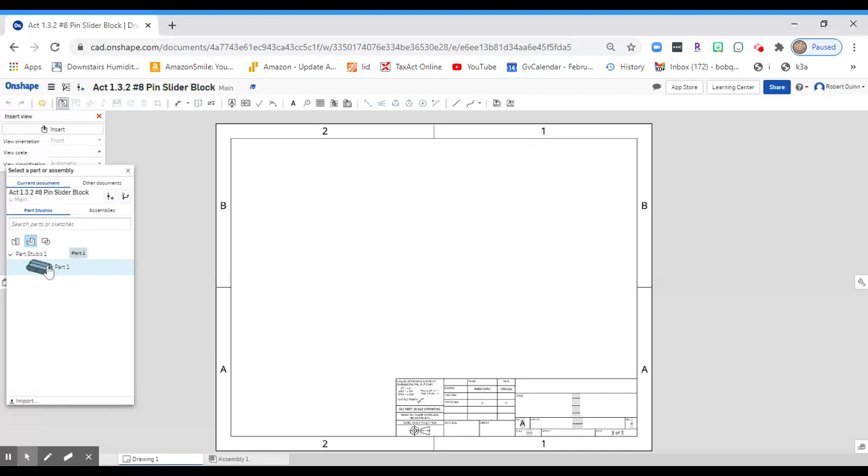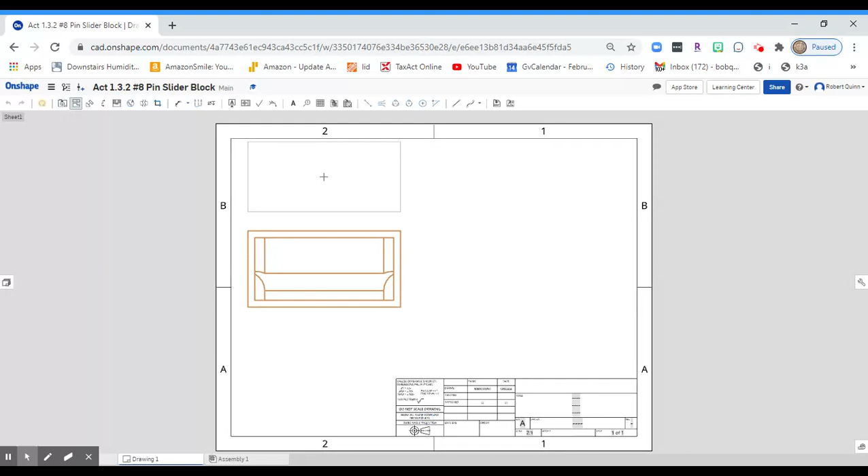Now the view it's going to give me, that's a better top view than a front view, so I'm going to click where it says front and change that to bottom. That's the way it's going to give me a better front view, so I'll click that as a front view. Now, there we go, that's a better top view. Notice I'm on the projected view by default, so if I click on the front view and go to the bottom, it's going to give me a bottom view.

Okay, I want to add a right view as well, so I'm going to click on the front view and then click on the right. Here it's going to give me a right view. And now I'm going to click on the front view, and I'm going to go up at the top, and it's going to give me an isometric view.

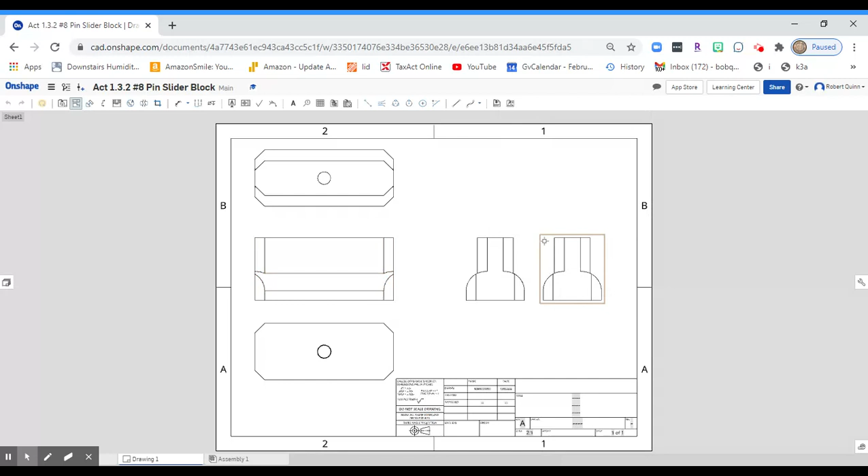Oops, I'm going to do Control-Z to delete that one. I'll just click on it and hit the delete key. There we go, that's better. Hit escape. Okay, I'm going to click back on my projected view, click on projected view, and I'll make an isometric one. That's good for an isometric view.

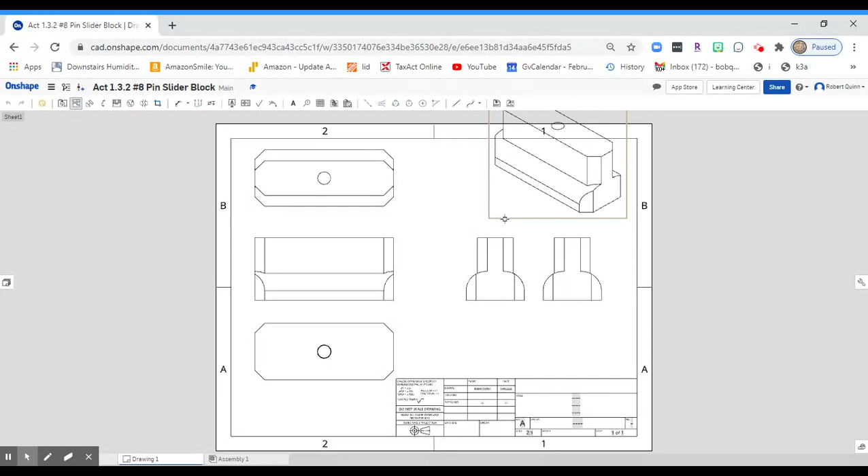I'm going to hit escape to get out of the projected view, and I'm going to right click on my isometric and show shaded view. And I'm just going to move it down here so that it's on the page. Now you see I've got two views, I only need one, I'll delete one.

Okay, now I'm going to go ahead and right-click on the front view, and I'm going to show hidden lines. I'm also going to do the same in the right view, right-click, and show hidden lines. There are no hidden lines in the top and bottom views, so I don't need to worry about that.

I'm going to click on the center mark, which is the plus, and make a center mark in the top view and also in the bottom view. Next, I'm going to go ahead and choose hole callout to dimension the hole. I'm going to click on the hole drilled from the bottom, so I'll put my hole callout on the bottom. That gives me the size of the hole.

I forgot to put hidden lines in the bottom view, so let me go ahead and fix that. Let me right click and hit escape to get out of my hole callout. I'm going to right click the bottom view, and show hidden lines in my bottom view.

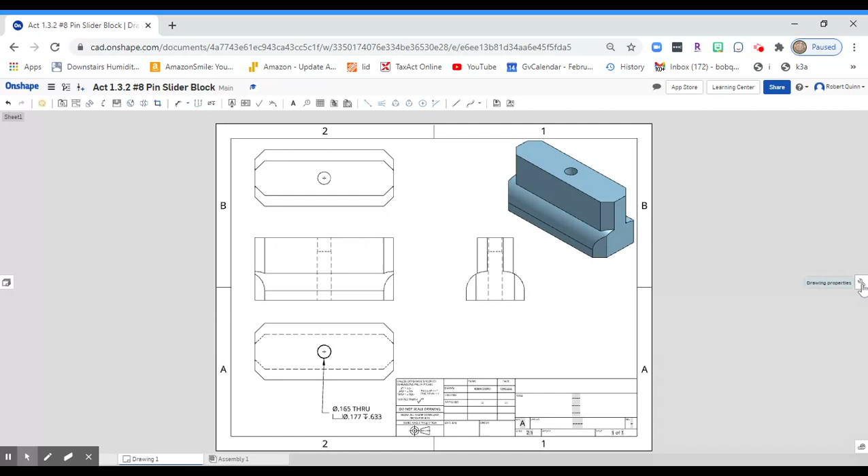Next, I'm going to show you how to do the chamfer. Now, when Onshape makes a chamfer, it does it incorrectly, or I should say not the way we made it. So I'm going to click on Drawing Properties here, and click on the next one for Dimensions, and I'm going to change it.

It's going to go under Chamfer Dimensions. If it's a 45-degree chamfer, which is what I did, it's going to do it as a length and an angle, but we want it as length by length because that's how we made it. So now when I do my chamfer dimension, it'll do it correctly.

So to make a chamfer dimension, I'm going to click this down arrow under dimension, and choose chamfer dimensions. Now I'm going to click on the chamfer, and then click on the side next to it. There we go, so it gives me .125 times .125.

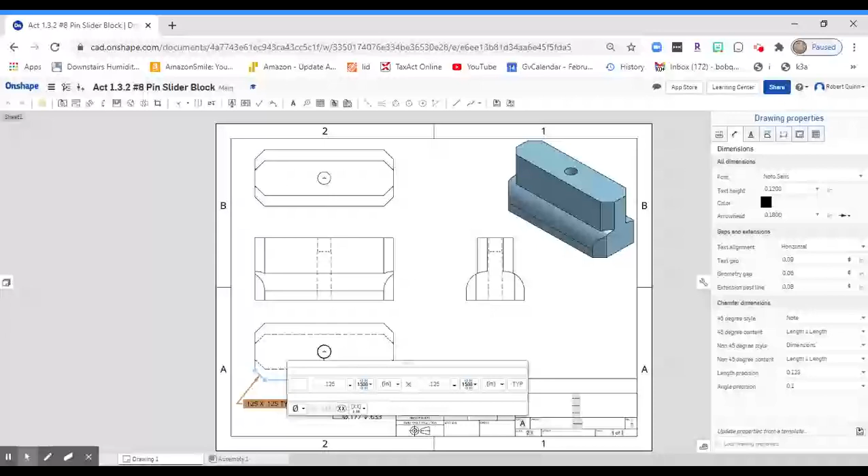Okay, now I'm going to click, now I'm going to double click on that number, and at the end, after inches, I'm going to type space uppercase TYP, and then click out here. What that does is typical means that all the chamfers on that document that look like that are going to be that, so that specifies that all the chamfers are the same.

Next I'm going to dimension this fillet. I'm going to click on the down arrow for dimension and choose dimension, and click on the fillet. It gives me a radius of 0.25. Now I'm going to double click that and add that space TYP again, which means it identifies both fillets as being the same.

Now I need to go ahead and add all of the dimensions that I need. So I'm going to choose D for dimension, and click the top and the bottom, so that way it gives us the total height.

Before I forget, I want to go ahead and do edge to end center line. So I'm going to click on the two hidden lines for the holes, and there it adds a center line. I'm going to do the same thing with this one, same thing in the right view.

Okay, so now we've got our center lines. Now let me go ahead and continue with my dimensions. D for dimension, I'm going to specify the width in the top view.

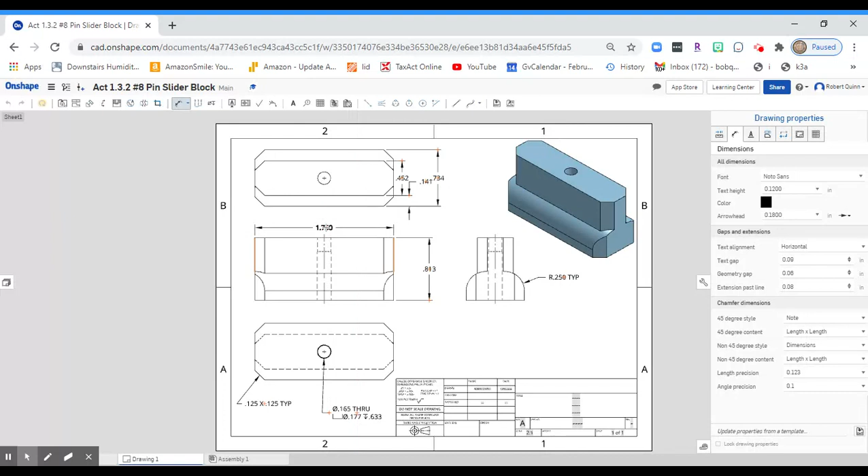I want to specify the location of my hole and the edge to my hole. I also want to specify from my hole to the edge in the Y direction, so I've got the location of the hole in the X direction as well as in the Y direction. I need to specify the height from here to the top.